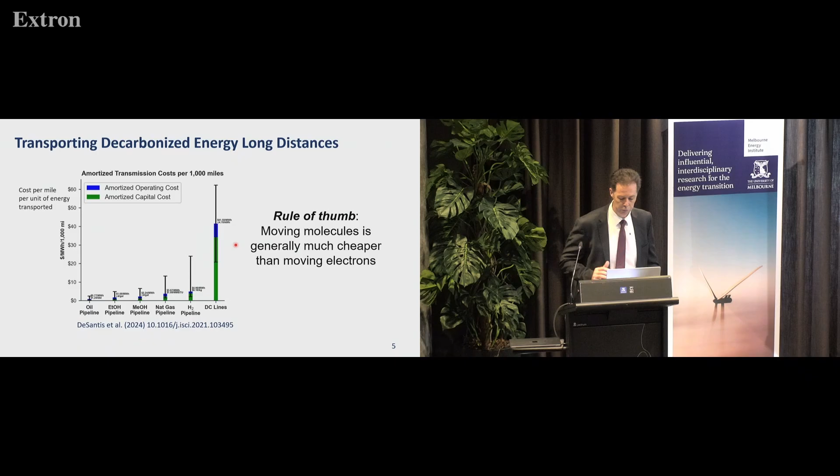So the key takeaway here is there's a rule of thumb: if you're going to move energy, moving molecules is a much cheaper way of doing it than moving electrons. And the way in which people move molecules most efficiently is to build pipelines, whether it's liquid or gas pipelines. Pipelines are critical technologies, really a marvel of engineering.

They allow us to access remote reserves of energy, such as these gas fields offshore Western Australia, to bring that gas up to a few thousand kilometres subsea to liquefied natural gas plants in Western Australia. There's also a 2,000 kilometre pipeline that goes from that site down to Perth to provide that gas energy. It's amazing to try and imagine a pipeline built, or started being built, in 1979 — something of that scale being done today — but that's a discussion for another time.

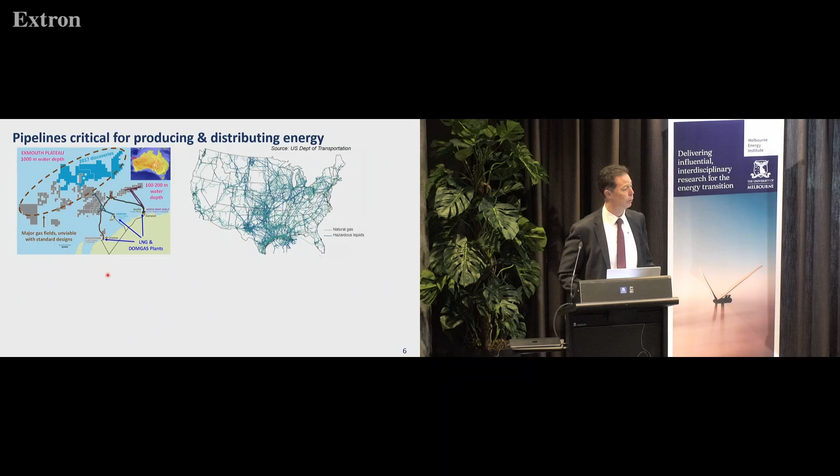If you look at the United States grid of pipelines, it's even more incredible — something like 3 million miles of pipeline infrastructure if you were to put it end to end, which is 12 times the Earth-to-Moon distance. So pipelines are the way to go if you can build them, and they're very cost effective when it comes to making energy transport.

But when it comes to moving energy across sea, that's when these gas pipelines become more expensive than the alternative, which is to ship the energy. This chart shows, again in dollars per unit of energy, as a function of distance between where the energy starts and where it needs to go, that by the time you're offshore about 1,000 miles, it's cheaper to build the facilities to liquefy, ship, and then regasify that gas using LNG technology.

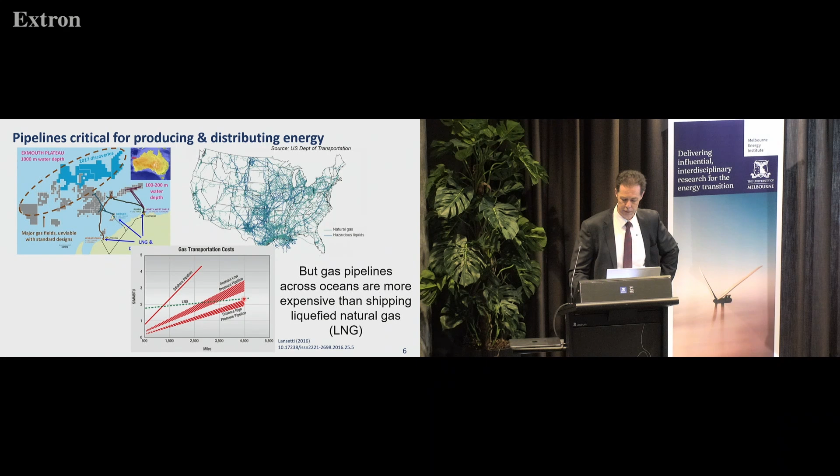Even on onshore pipelines, at certain distances it becomes cheaper, or almost as cheap, to make LNG. So across oceans, shipping liquefied natural gas is the way to go if you need to move large amounts of energy around. That has led, over the last 50 to 60 years, to the development of what's now a very mature supply chain: the liquefied natural gas supply chain, which basically has 4 stages.

Production of the gas — it gets treated to remove impurities that are incompatible with its safe use and long-term storage. Then it's liquefied and waits in storage systems before it's shipped to where it needs to go, and then converted back into the gas phase.

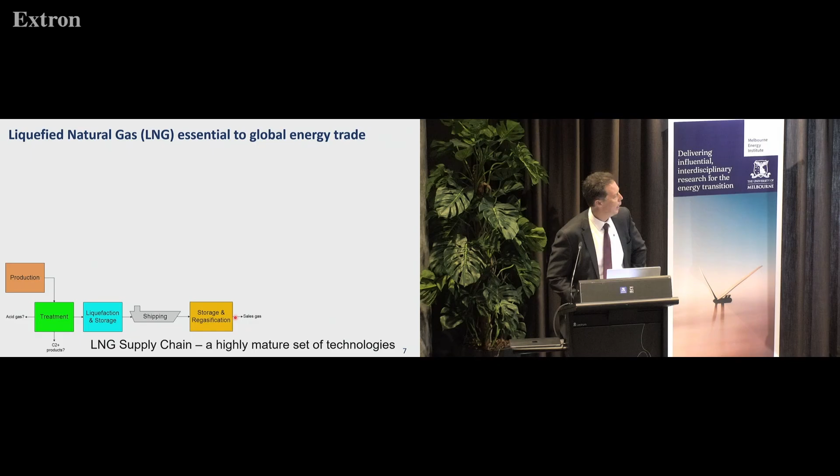As of 2024, the world's system for distributing gas from where it's available to where it's needed is again a remarkably complex system. About 25% of the world's gas is transported as liquefied natural gas, and the geopolitical tensions that have occurred in Europe have largely been addressed, at least in terms of energy security, through this technology — not to mention the incredible growth in demand for gas in Asia, particularly Japan and China, where we see energy exports as a business opportunity.

They see it as national security. So it's very important to those countries.

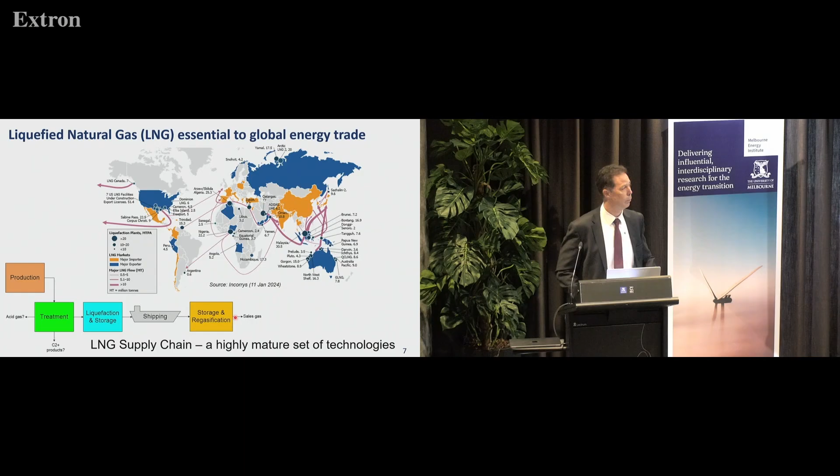So what has the LNG supply chain got to do with a decarbonised energy system?

To answer that question, let's start with the rule of thumb that moving molecules is generally much cheaper than moving electrons. So the natural question when you apply that to a decarbonised energy system is: which molecules are we going to need to move around? For reasons I'll explore later, hydrogen and carbon dioxide are highly likely candidates that will need to be moved as part of this decarbonised energy system.

Noting that we need to almost certainly transport some of this across oceans, the efficient transport of these two molecules can be achieved by storing them as cryogenic liquids. Therefore, what we should do is apply the lessons learnt by the LNG industry about efficient transport of cryogenic liquids to the design of our new systems for distributing hydrogen and CO2, and also identify the differences, because they're not the same. There are subtle issues that will inform our research efforts, what new knowledge is needed to make these new distribution systems effective.

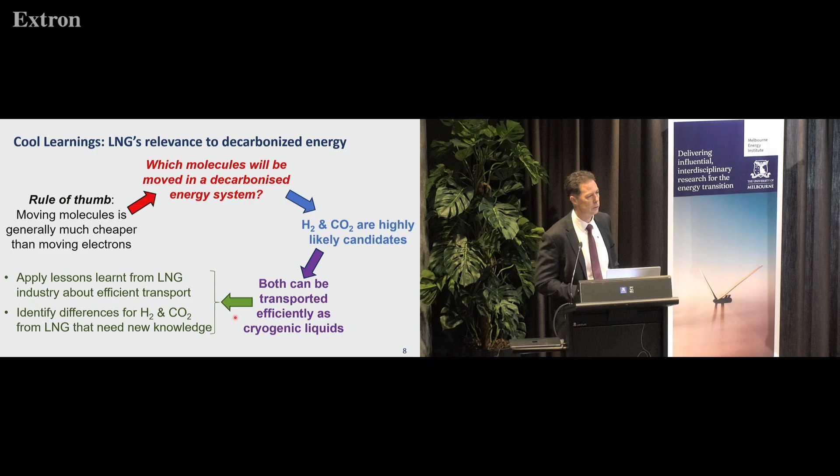So let's start with CO2. Why CO2? This is a chart from the Net Zero Australia project, led by Michael Brear, and one of my favourite charts. Don't worry, Michael, I'm not going to talk about the cost of net zero—this chart is about the amount of CCS that's needed in the various scenarios. I should say FEnEx CRC was very proud to be a supporter of both the first phase and the current phase of the Net Zero Australia project.

So what this chart is showing are the scenarios that project looked at for getting to net zero by 2050 for export—exporting the same amount of energy Australia currently does, but in a decarbonised way. In those scenarios we've got two bookends: the constrained renewables rollout, and the other bookend, full renewables rollout.

The scale on this axis is in millions of tons of CO2 per year, and the world's entire current CCS level is around 44 million tons of CO2 per year—that's the whole world. These curves are just for Australia if we were to get to net zero.

In the case where renewables rollout is constrained—perhaps because of supply chain, and constrained still means several, a factor of 2 or 3 faster than we've ever done it before in terms of deploying renewables, but maybe land access issues and other constraints mean we can't actually get rid of fossil fuels in the timescale you might think—we need basically up to 1 gigaton per year in Australia alone to achieve net zero.

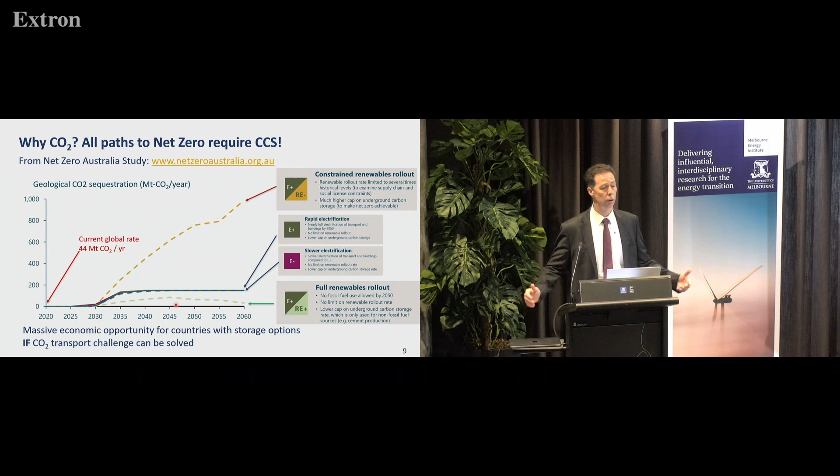So that's an opportunity for countries like East Timor, which has a developing economy—they have the depleted gas field, and the geology of that is very well known. Why not transport the CO2 to somewhere like Timor-Leste and inject it there, if the CO2 transport challenge can be solved.

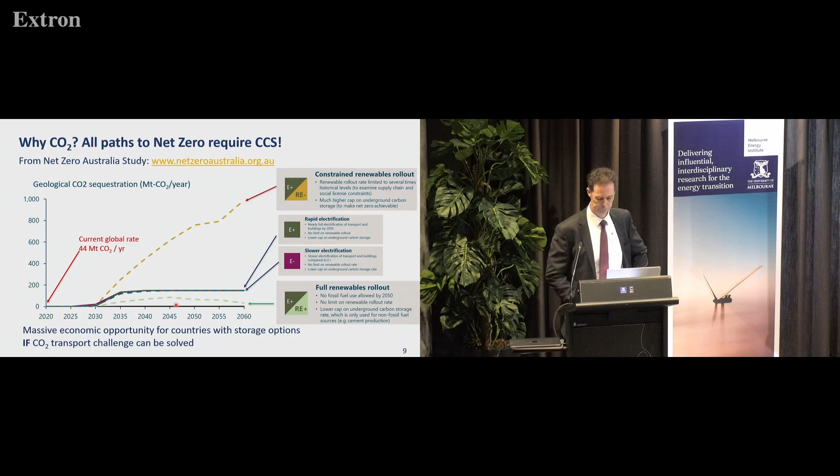So it's just on the edge of clean, but if you wanted to make it cleaner, the cost would go up slightly. $2 to $3 was the range, but again, these are desktop academic studies, so I wouldn't want you to invest your superannuation in these sorts of schemes. But of all the schemes we've looked at for delivering clean hydrogen to Japan, it's the most cost effective, with the weakest technical challenge part in this closed carbon cycle being the shipping of liquid CO2.

So across long oceanic distances, shipping liquid CO2 is also cheaper than transporting it by pipeline. You can, of course, transport CO2 by pipeline - the CCS project in Victoria that's planned... CarbonNet, that's it. A big pipeline plan to take the CO2 out to the Bass Strait. But for this sort of distance, shipping is very important.

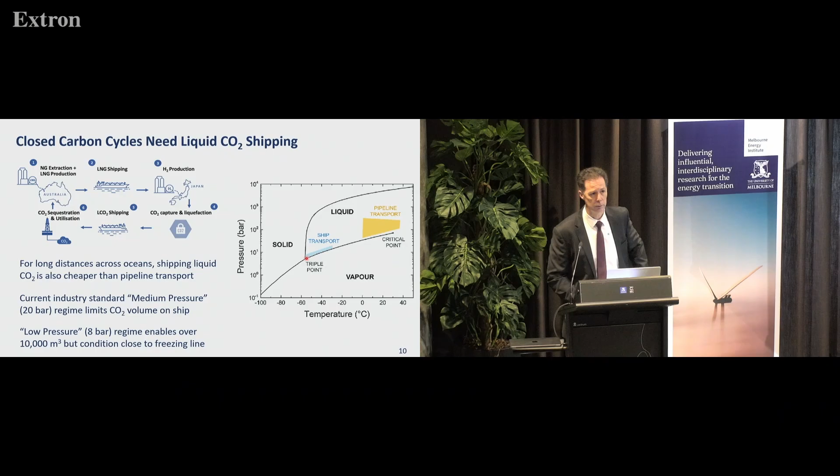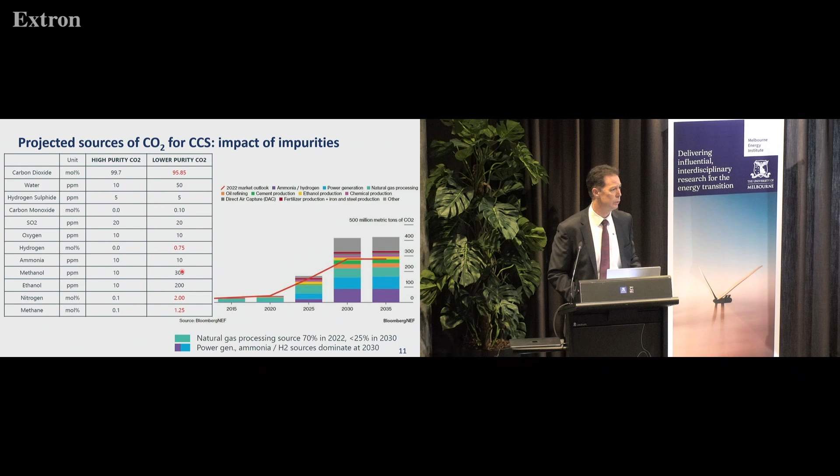But going forward, as we decarbonize hard-to-abate sectors and produce blue hydrogen and the like, there's going to be a range of different sources, which means a range of different impurities will be present in that CO2. The composition of this lower purity CO2 is still nearly 96% CO2, but you've got a few percent of lighter inerts and ppm levels, and this small variation of composition associated with the purity that is inevitable from these different sources causes a lot of technical issues.

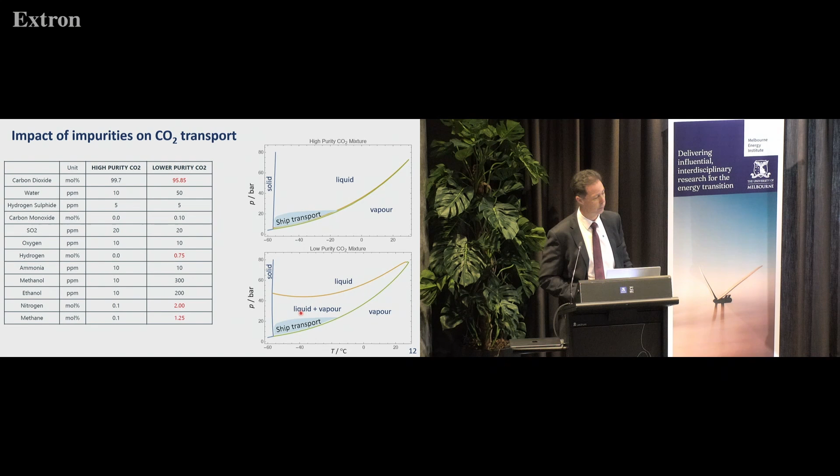But when you bring in these impurities, even just a couple of percent of nitrogen, methane, hydrogen and the like, you'll get a much greater increased phase boundary. And although I've shown those phase boundaries, the exact location of them is not super well known. So an active area of research is mapping out the phase behavior of these impure CO2 mixtures, not to mention the potential for acid formation that can occur from some of those impurities also listed there in the CO2.

When it comes to shipping the liquids, let's say we've dealt with that impurity issue, then we've got to actually design the ships to carry the cryogenic liquid. Cryogenic liquids boil off, and when they boil off, you've got to do something with the gas. What the LNG industry does is put compressors and heat exchangers to make a reliquefaction system on board those carriers. The question is, how big do you need those boil-off gas compressors to be? You don't want to make them too big because they're very expensive bits of equipment, and you don't want to make them too small because then you won't be able to deal with it.

It turns out that although this sounds like a relatively simple chemical engineering problem, it's highly empirical in the industry. People literally use charts to figure out, well, I've got this tank, this level, this pressure, and this will be the boil-off rate. So we've done some research over the years to deal with this complex, scale-dependent process, trying to come up with more fundamental models of boil-off gas.

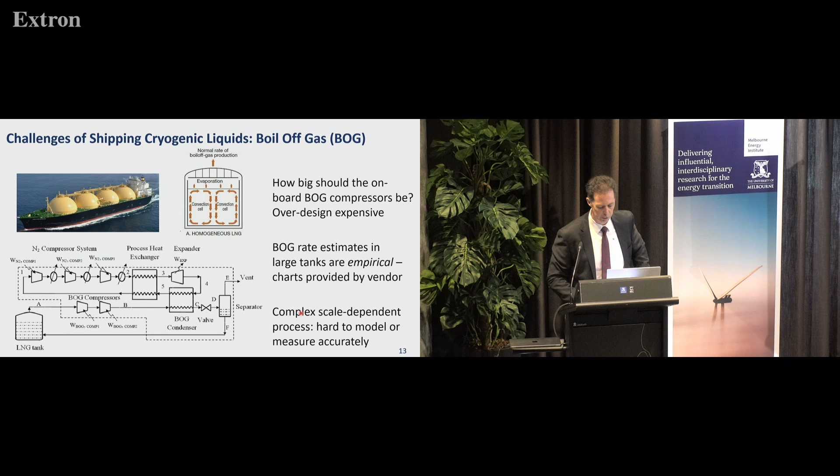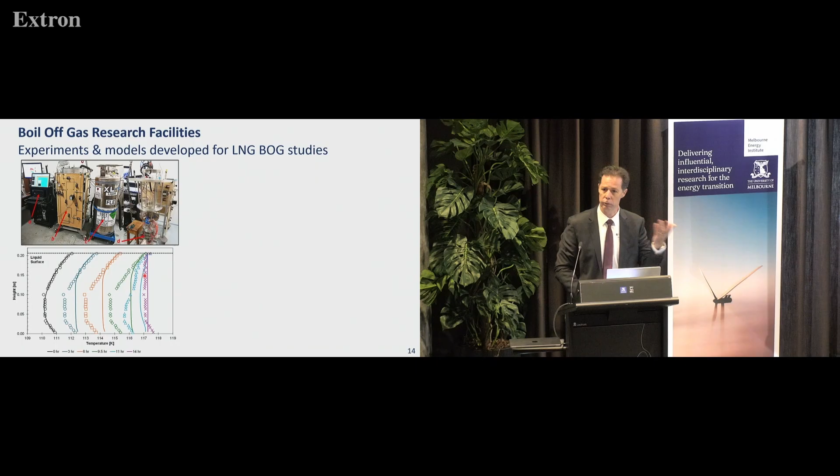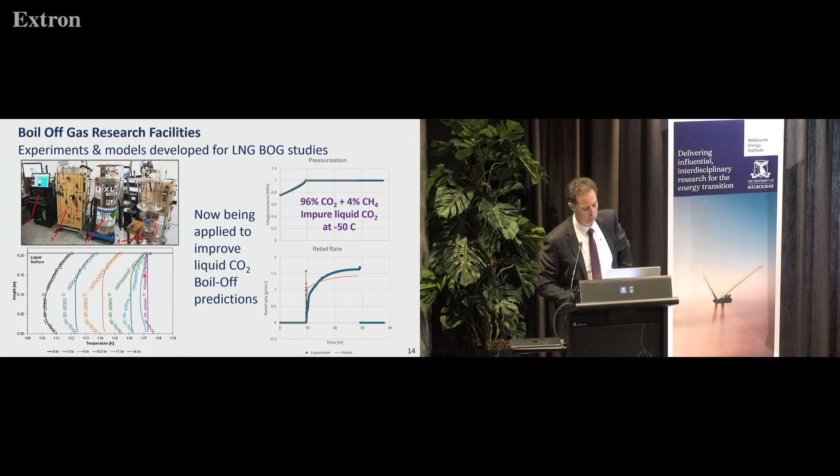But what was nice about this is we could take the model that we built for LNG and then apply it in a purely predictive way to predict the boil-off rates, pressurization times, and relief rates for liquid CO2 predictions. Without any adjustment of any parameters, the job it did was pretty good. There's still further work to do there, and we're continuing to do so. But by taking the models developed for LNG and applying them, you can rapidly use that to size the compressors you might need in a liquid CO2 transport system.

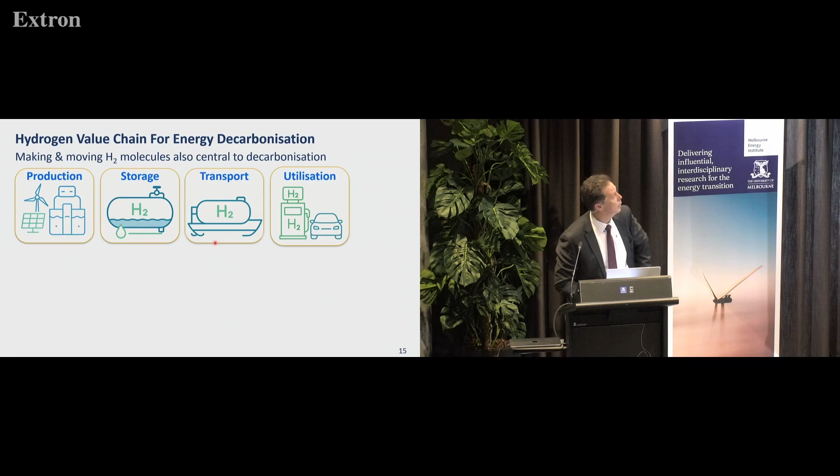So now I want to move to the other molecule that I mentioned, which was hydrogen. You can see why, because this hydrogen value chain has a lot in common with an LNG supply chain. You've got the production—here we're generating it by electrolysis—but then you need to store it. And that's the big challenge with hydrogen: its energy density as a gas is terrible. So one way to deal with that is to convert it to a liquid phase, then transport it and use it. It's highly analogous to that LNG supply chain, particularly if we're talking about liquid hydrogen.

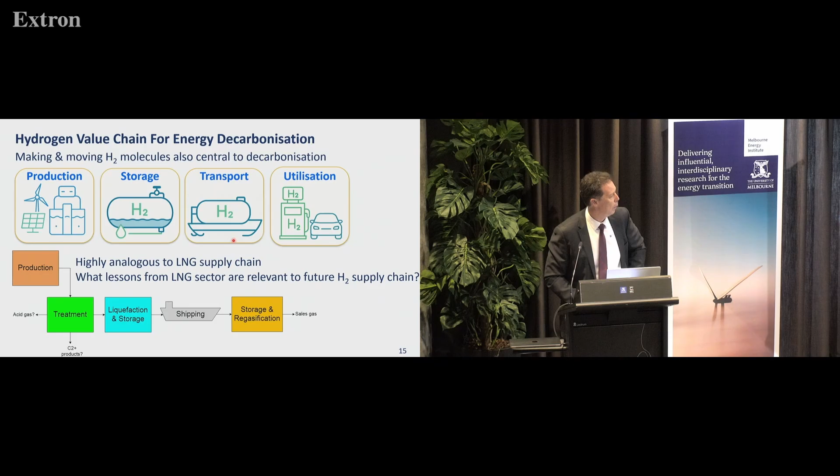What lessons can we draw from the LNG sector to establish this future supply chain? Well, I said before, the LNG supply chain, which involves cryogenic liquefaction, is highly mature. You have to cool the gas down to -160°C. That's a heat exchanger they typically use for a large-scale LNG plant.

A bundle of pipes, which basically gets sprayed by a refrigerant on the outside to cool the gas down. What could go wrong?

Here is some operating data from a liquefied natural gas plant in Qatar around 2014. The chart on the right axis shows the pressure drop across this cryogenic heat exchanger in red, whereas the black curve is the impurity level of heavy hydrocarbons, C5+, in mole percent. We're at under 1,000 parts per million here, which is the specification. You can see that for most of the year, everything was fine.

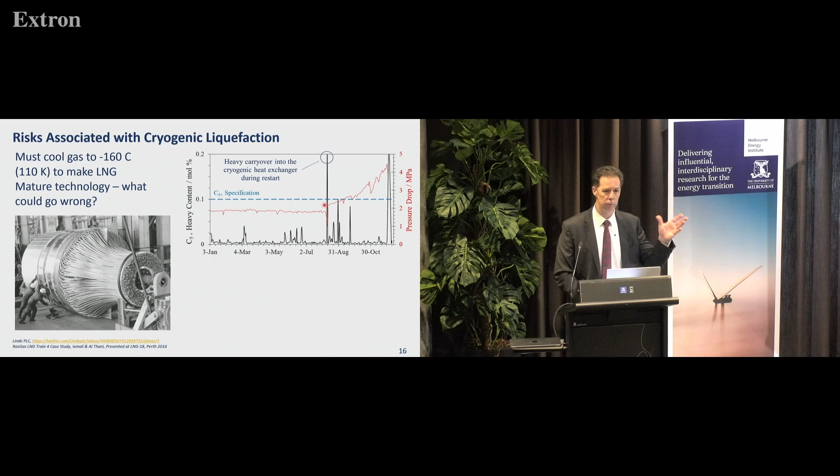You get this natural sort of variation in the feed to the cryogenic heat exchanger. They had a planned shutdown, they restarted, and then very briefly they got a spike of heavy hydrocarbon carrying over into that LNG heat exchanger. After that, for the next three months, the pressure drop across the heat exchanger continued to rise until around December, where they basically concluded they had to shut the plant down.

This is analogous to the problem of eating too many fries and chips and the like. You're building up deposits in your arteries, and the pump can no longer push it around. So what we're basically showing there is a signature of something like a heart attack for an LNG plant.

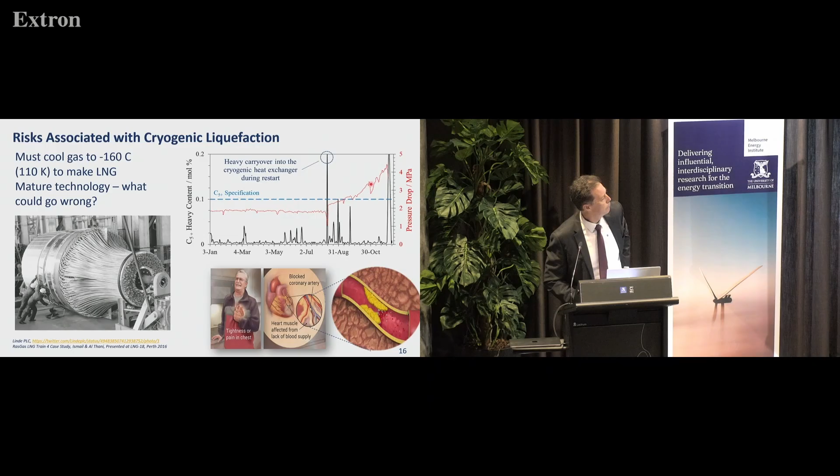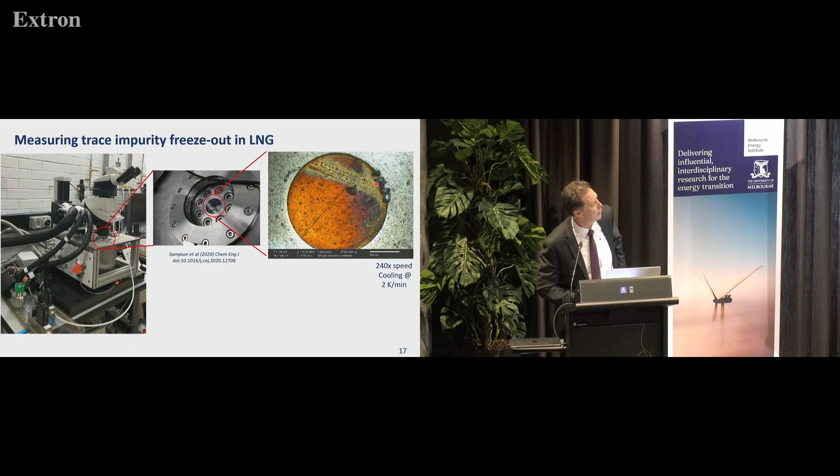Work we did with the industry was to get to the bottom of that. We built high pressure cells that could be observed by a microscope, and we can zoom in on a cold spot in that system with the microscope, looking down. It's full of methane with a little bit of an impurity called benzene, and as we cool, you can see that plaque starting to come out of solution.

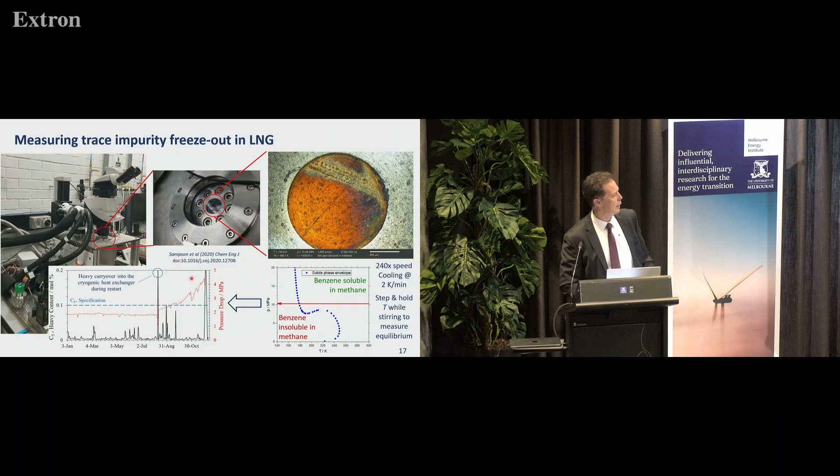Essentially what we're doing is mapping out this data, which the industry had a lot of uncertainty around, and engineers are really good at dealing with uncertainty. They just have bigger margins, but that costs money. So essentially we're mapping out that boundary where the solids come out of solution, so that we can more precisely target and understand exactly what went wrong in this plant example.

Okay, so now we're going to take that lesson and apply it to liquid hydrogen. If you think LNG is a massive engineering challenge, then liquid hydrogen is almost an insane one.

The reason is that you have to cool it about 90 degrees lower in temperature, and you spend about 7 times more energy, which amounts to about 30% of the energy that's in the hydrogen getting used in essentially liquefying it. Still, probably, arguably, one of the most practical or cost-effective ways to store hydrogen. So that tells you something.

This schematic shows you roughly how it gets done. You take your hydrogen feed, you compress it, then you basically send it through a heat exchanger which cools it down. I'll talk a little more about the details of this heat exchanger, but there's a catalyst involved. It goes into the separator, and then you form your liquid hydrogen.

And again, you have to deal with the boil-off gas problem. So everything that I said about LNG boil-off is also applicable to liquid hydrogen. But I'm going to focus on this part of the cycle. You've got this impurity risk of freeze out again, and now it's not just freeze out in the heat exchanger, it's freeze out on the catalyst in the heat exchanger.

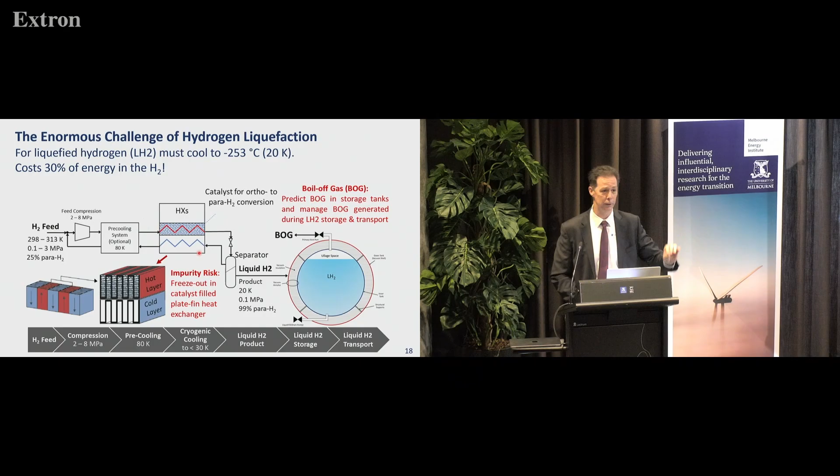So how much impurity can we tolerate in liquid hydrogen? What's the likely impurity? Well, nitrogen is ubiquitous. So you go and look at the data that exists, and NASA has been doing this also for 60 years, but they never cared about the cost. So that's why this is an actual engineering challenge, because we need to get this more reliable and cheaper.

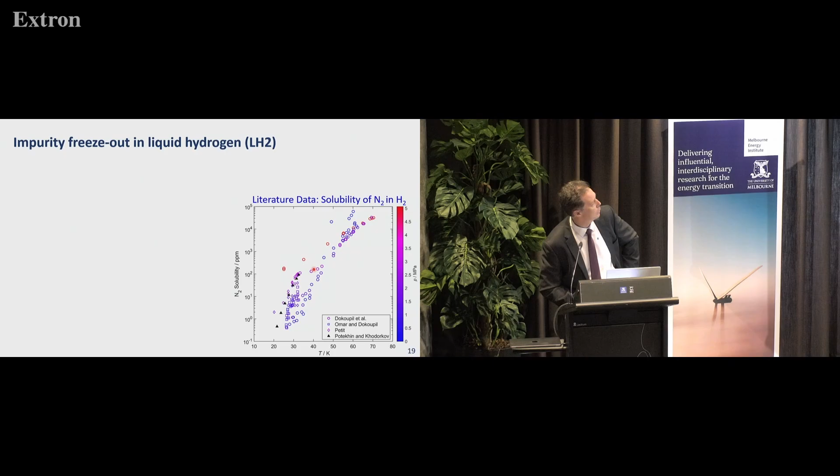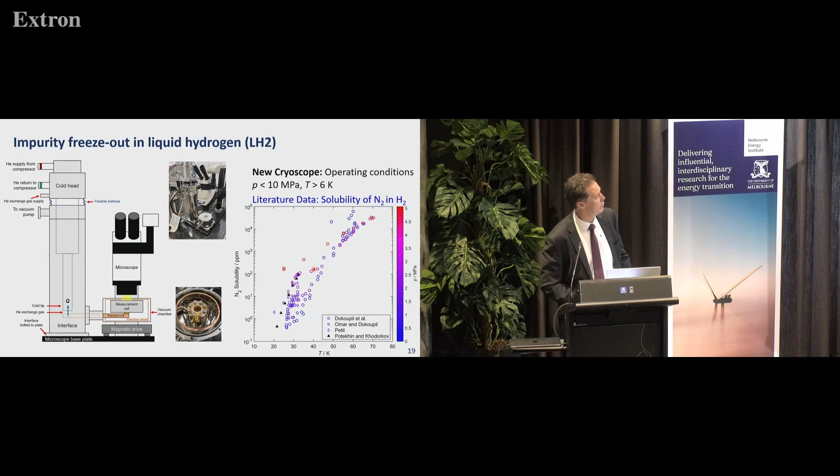So we set about and built a similar apparatus based on a microscope and a high pressure cell that allows us to actually see when the solids come out of solution. And we have generated new results for part per million solubility of this impurity in hydrogen.

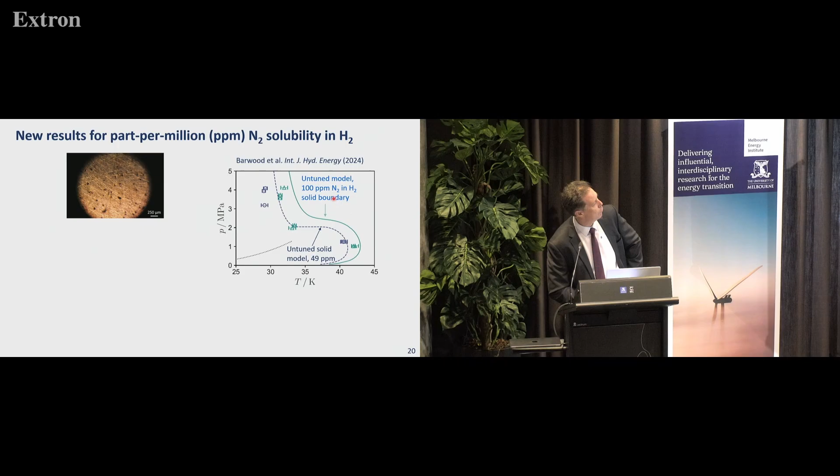This is a diagram showing pressure and temperature space, where solids start forming for different concentrations. The untuned model that engineers would normally use is this turquoise color for 100 ppm, and the data actually are well inside it. At 50 ppm of nitrogen, again, the data are much further inside the phase boundary.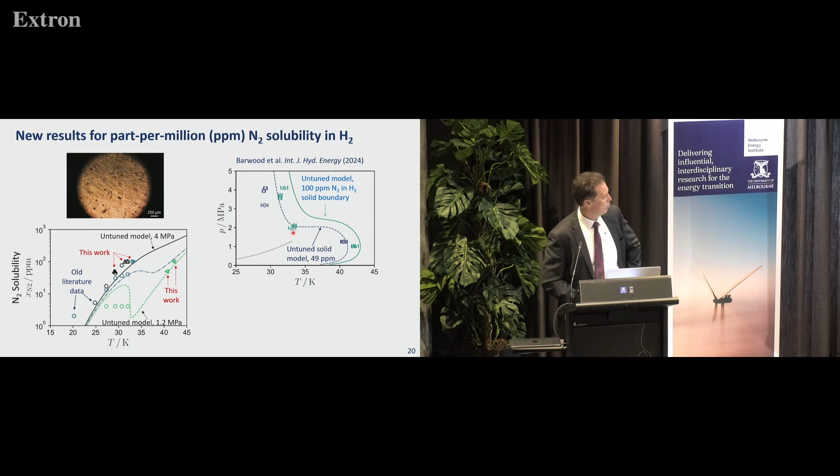Plotting it in a different way, as a function of temperature and the solubility limit, we've got data up here. What's important is that these kinds of data allow us to identify which of the results in the existing literature are trustable and which aren't. As a result, we were able to show that nitrogen is about 10 times less soluble in liquid hydrogen than previously thought. That's an issue the industry will need to deal with.

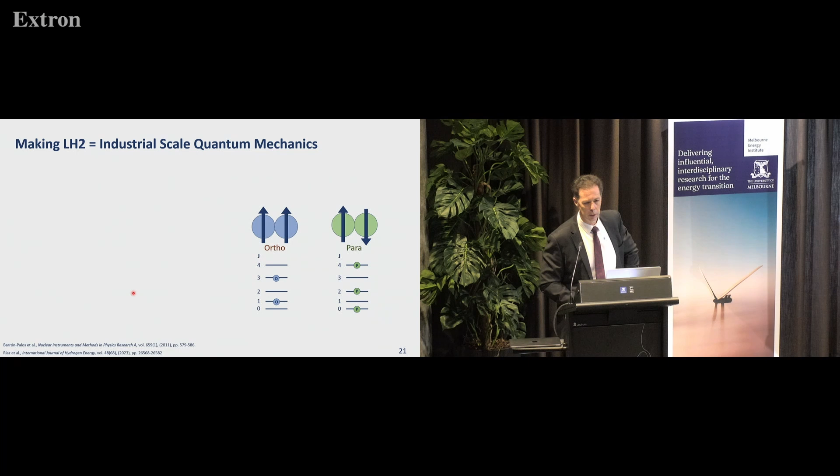The other thing I think is cool about liquid hydrogen is that it's one of the few examples in the world where quantum mechanics actually matters at an industrial scale. Hydrogen is a mixture of two quantum mechanical states of the molecule, known as ortho, a higher energy state where the two nuclear spins are aligned, and para, where they're oppositely aligned, a lower energy state. In terms of their angular momentum, these two things are different, and at equilibrium, thermodynamics causes the molecules to want to be arranged in different ratios.

At room temperature and above, basically 75% of the molecules are in that ortho hydrogen state. But at liquid hydrogen temperatures, which is only 20 Kelvin, equilibrium ultimately requires them to be 99.8% in that low energy state.

The problem is that this conversion is forbidden by quantum mechanics for an isolated molecule, so in a real system it happens very slowly. Literally, you can watch this happen over days and weeks. But the real kicker is that the heat of conversion, the energy released as that reaction occurs slowly, is actually more than the energy required to boil off the gas. So you can spend all that energy liquefying your normal hydrogen, wait a few days, and half of it will boil off, wasted because of that quantum mechanical effect.

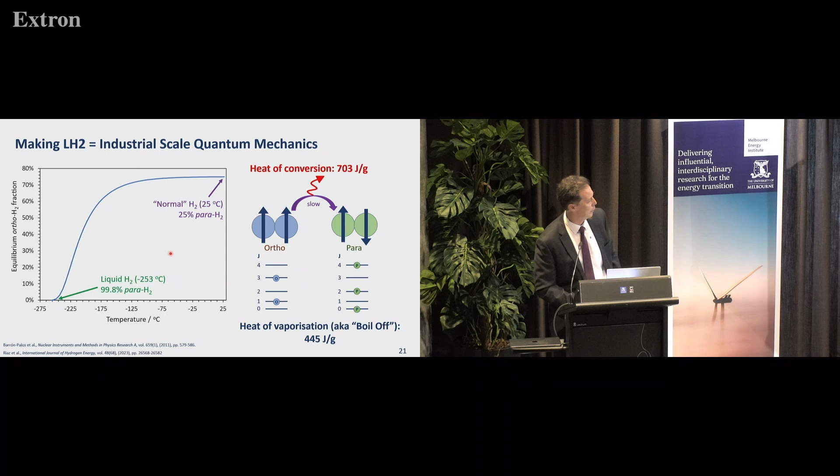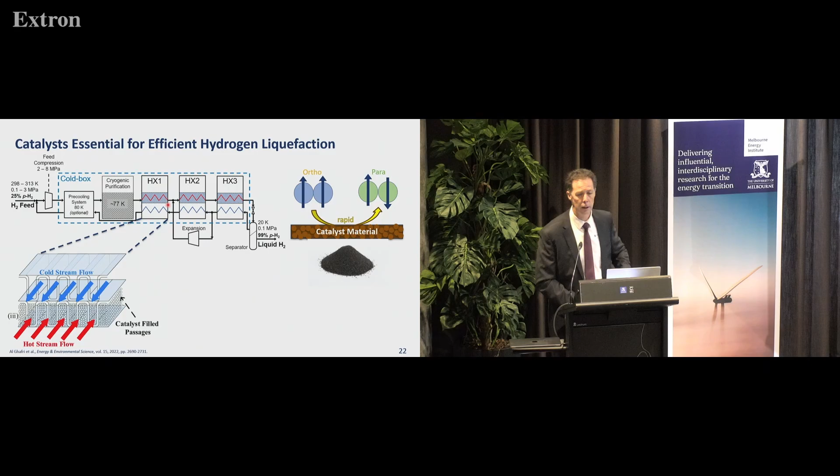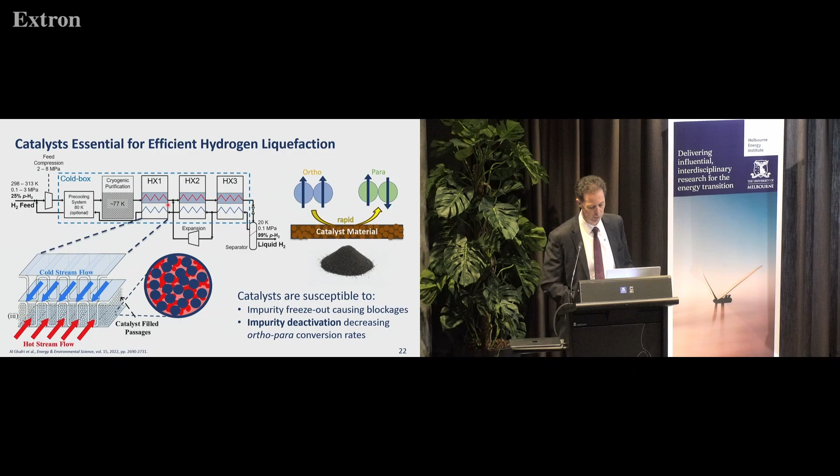That's why they have to use catalysts, placed inside the heat exchangers. These catalysts, essentially an iron oxide powder, make that transition very fast, so the conversion occurs on the residence time scale of the gas flowing through the heat exchanger. The heat can be taken away by the refrigerant, avoiding the problem of ortho-para conversion happening later. But catalysts are even more susceptible to impurities than perhaps would be the case in LNG. So it's not just about blockage, now it's about deactivation of that catalyst and the effect of impurities on those ortho-para conversion rates.

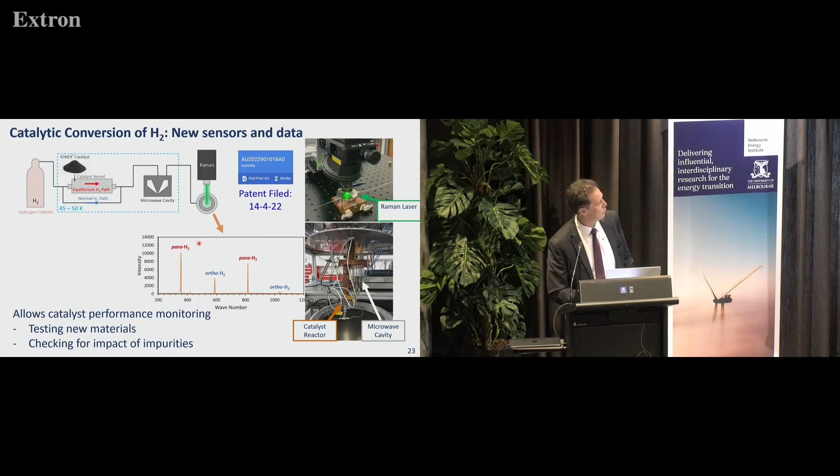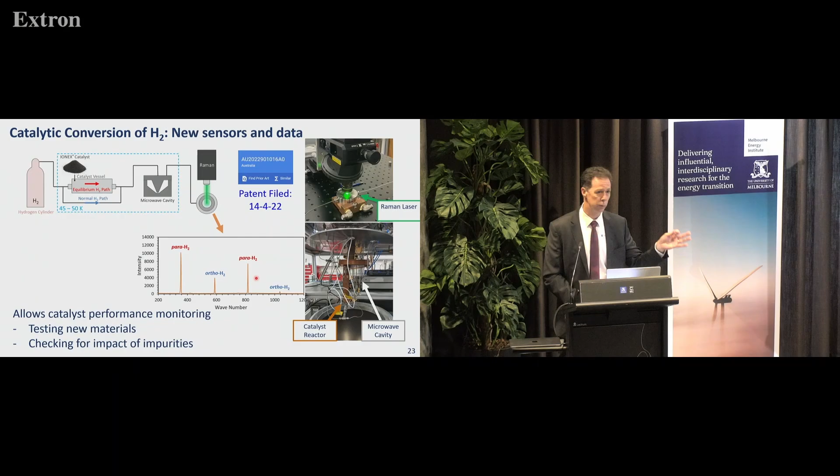We've spent a few years building systems that allow us to study these in depth. One of our systems is shown here, where we have a reactor and various sensors that let us measure and see what quantum state the hydrogen molecules are in. Here's a Raman spectrum showing that at this low temperature there's more para-hydrogen than ortho-hydrogen. This allows us to test new materials, working with industry partners, and also to check how impurities affect performance and catalyst regeneration.

Because once the blockage forms, you're talking about weeks to fix a large-scale cryogenic system, warm it up, fix it, which is known from the LNG industry.

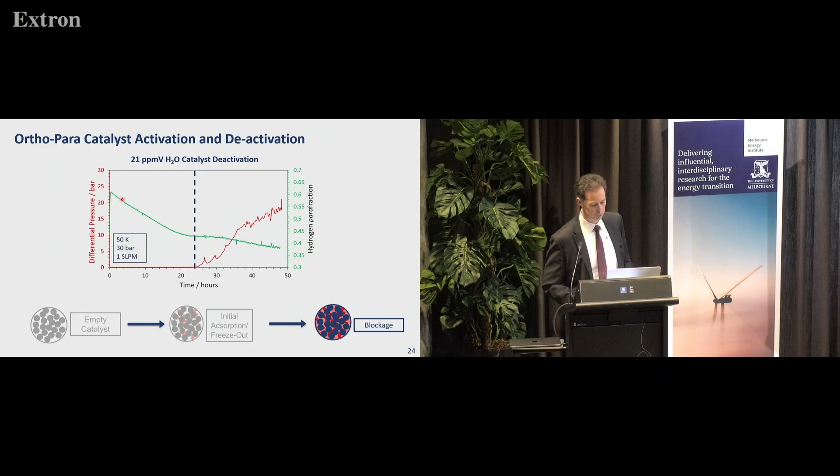So the final example I want to come to is around how do we lower the cost of making liquid hydrogen. This is a project that the FEnEx CRC is doing with the University of Melbourne, and Richard's team is heavily involved, as are others here today, and the UWA team, with support from ARENA.

This is showing the amount of energy required to liquefy a kilogram of hydrogen. Current state of the art is around 10 kilowatt hours per kilogram. The thermodynamic limit is just below about 4. People have talked about ways they could bring that down, but these are all hypothetical, not even demonstrated. They're done in process simulators, but no one knows whether they're real or not.

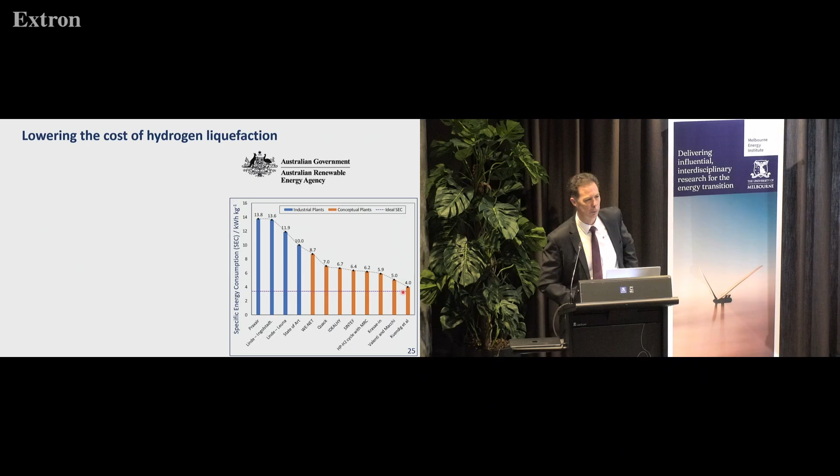The basic idea, from the LNG industry which I worked out a long time ago, is that if you use a mixture as your refrigerant, you can achieve a closer match between the cooling temperature and the hot temperature, so the heat transfer efficiency is much better. The other problem with hydrogen is the only refrigerants usable at those low temperatures are very light molecules, so compression is a problem.

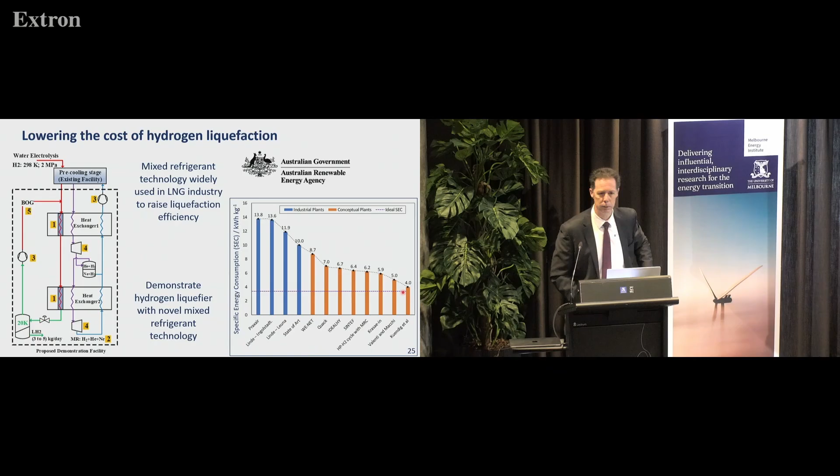What we're going to do in this ARENA grant is essentially try a mixed refrigerant for the first time in hydrogen liquefaction, where you take helium, the normal refrigerant, and put in some neon, so you make nelium. This allows you to tune its composition to match the cooling curve, and it also gives you a larger molecular weight, so the compression can be done a lot more efficiently.

One of the issues is you can't do this at a small scale with simple compressors and expanders - you can do it, but the data you get aren't representative of what's required to prove it up at large, industrial scale. You really do need to have a turbo expander.

So we've essentially finalized the construction of this system, where we'll be testing this mixed refrigerant nelium through a couple of heat exchangers to liquefy a stream of hydrogen, and importantly it does have a turbo expander therein. We've taken a commercial design that works at about 100 kilograms a day of hydrogen, and adapted it to use this nelium.

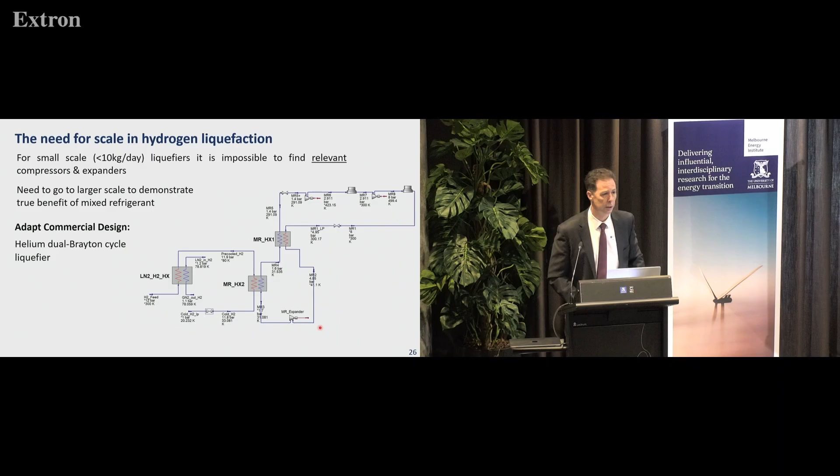So once we demonstrate that this works, we will actually be at a scale which is already commercial in the market. This will be demonstrated at the flagship project of the FEnEx CRC, called the Kwinana Energy Transformation Hub.

Kwinana is the industrial area south of Perth, about 25 kilometres. The state government has allocated the CRC about 3 hectares of land, and we're going to be building there 100 kilograms per day of electrolysis, coupled into this liquefier shown here in its schematic.

And there will also be a lab building on site. The purpose of this is to do the sorts of larger scale demonstrations that simply can't be done in labs, but are needed to allow technologies we develop in our laboratories to be translated into industry.

So no one's taking a risk on a $1 billion plant. It doesn't matter how good your data in your lab is, they need to see it work at a scale that they can trust, and that's the case.

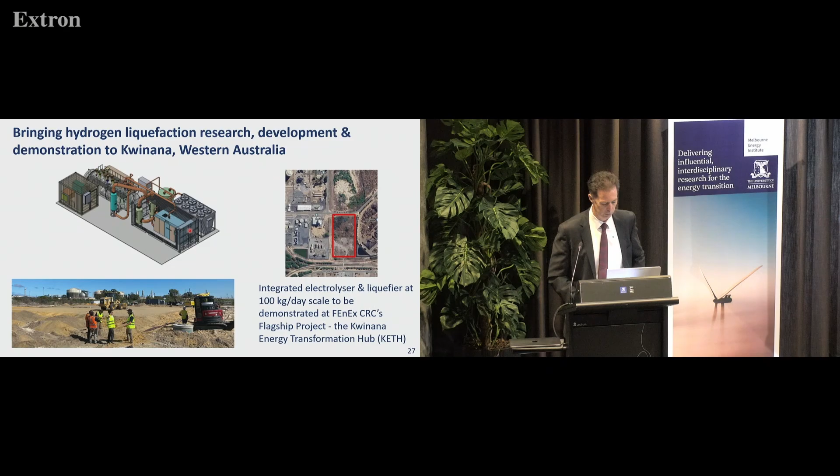So on Wednesday I was down on site, and that's the current progress of the KETH facility. That'll be where the building goes, and we'll be putting that liquefaction system inside - well, the liquefaction system outside, but we'll also have systems inside.

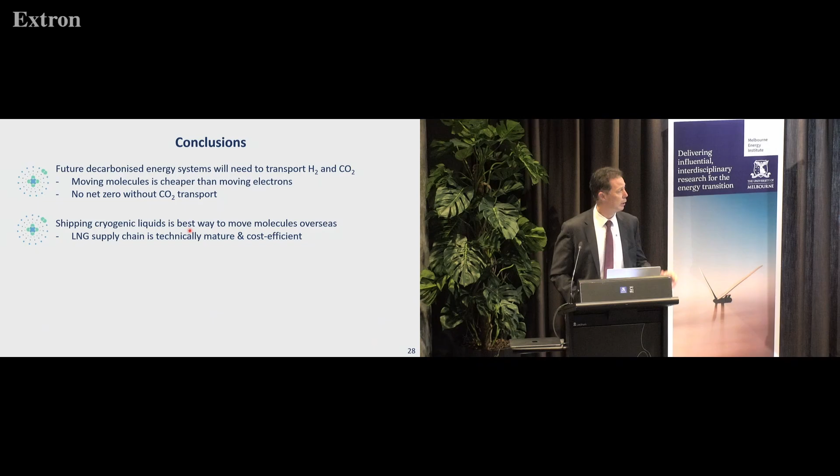So to conclude, future decarbonised energy systems will definitely need to transport and store hydrogen and CO2, because moving molecules is cheaper than moving electrons, and there is no net zero without CO2 transport. Shipping cryogenic liquids is the best way to move molecules overseas, and the LNG supply chain is technically mature and cost efficient, so we should take as much of the lessons they've learned and use them as our starting point for these new supply chains. In particular, identify differences where CO2 and hydrogen's specific features require new knowledge, and so we're underway doing the research to provide those solutions.